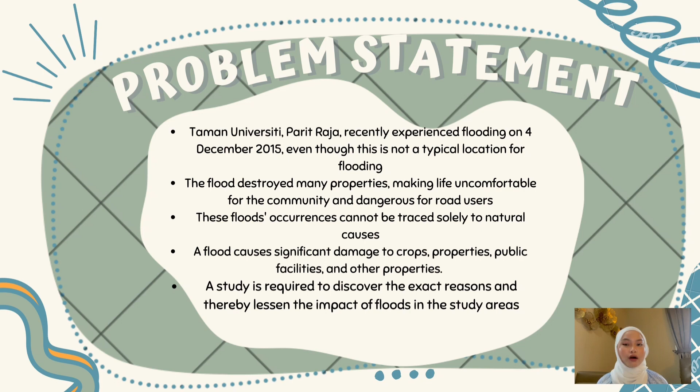There are a variety of factors that can cause floods. These flood occurrences cannot be traced solely to natural causes. As we all know, floods cause significant damage to crops, properties, public facilities, and other properties. Therefore, a study is required to discover the exact reason and thereby lessen the impact of floods in the study areas. Next, the chosen study area is at Taman Universiti Parit Raja.

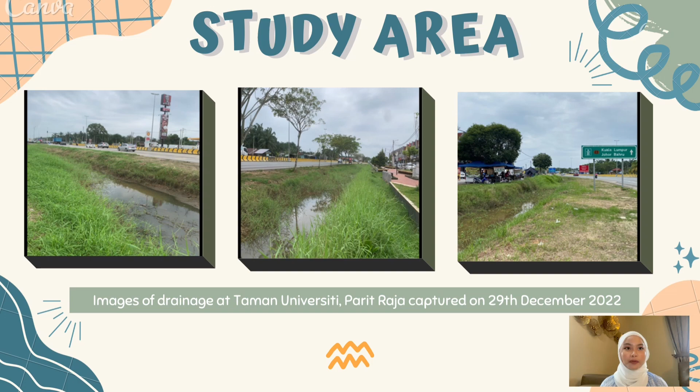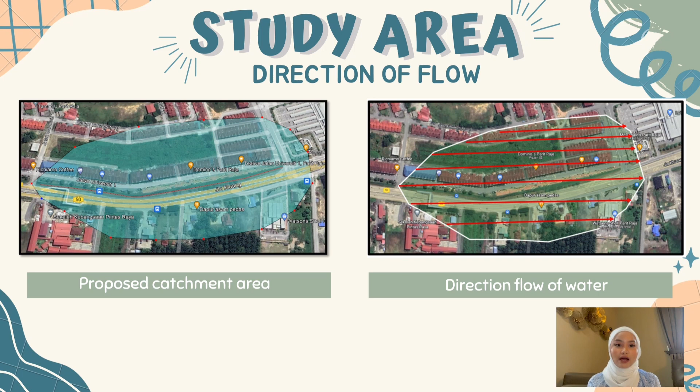The first figure shows the proposed catchment area for this case study at Taman Universiti Parit Raja. Meanwhile, the second figure illustrates the water flow direction inside the proposed catchment boundary. The anticipated direction of water flow in Google Earth Pro is governed by the terrain elevation. The current drainage is denoted by the white line, whereas the passage of water over land is denoted by the red arrow.

Based on observation in the study area, there are various reasons why this area is prone to flash floods. Heavy rainfall is the most significant factor that causes flooding. Besides, in this study, the issue that causes flash floods in the study area is the need to maintain the existing drainage system, because without maintenance, the drainage will get clogged with overgrown vegetation and trash. The weeds and overgrown grasses will clog the drainage and prevent the water from flowing smoothly.

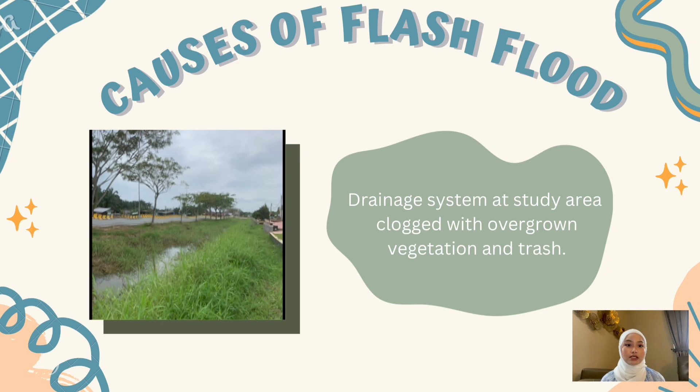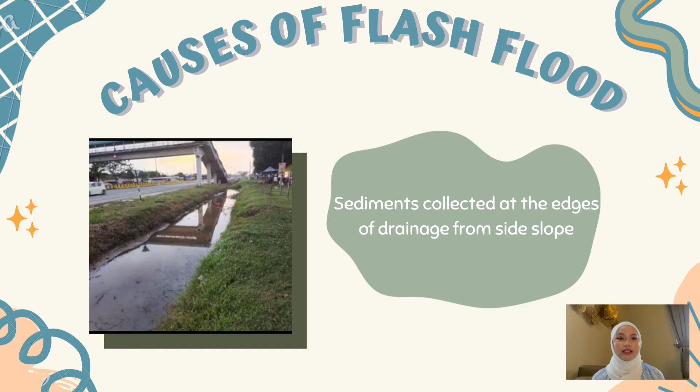Next, the formation of sediments at the drainage bottom is a second factor that can make the area susceptible to flash floods. From the observation at the study area, erosion from the existing drainage side slopes contributed to the formation of these sediments, which can increase the thickness of sediments at the drainage base. The figure shows sediments collected at the edges of drainage from side slope erosion. Therefore, this can cause the drainage depth to drop, which in turn causes the slope area to diminish.

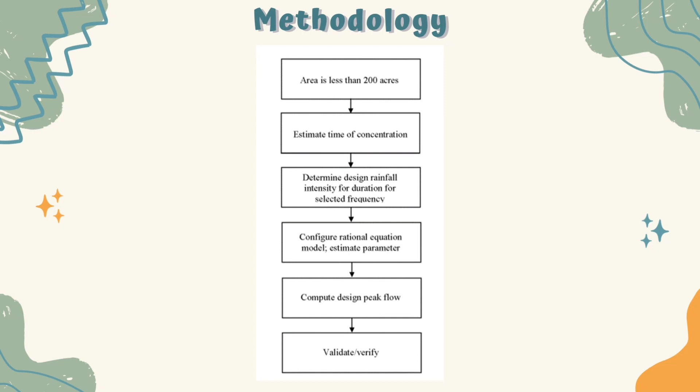Next, the design rainfall intensity needs to be determined for the duration and selected frequency. The intensity duration frequency, or IDF, curves will be used to determine peak discharge. In order to reduce the error, empirical equations can be employed to estimate the value of rainfall. Afterwards, the rational equation model will be configured. It estimates runoff from small drainage systems with a significant amount of impervious land. These steps will compute the peak flow of the design. Therefore, this study can design the stormwater system to prevent flash floods. That's all for the methodology.

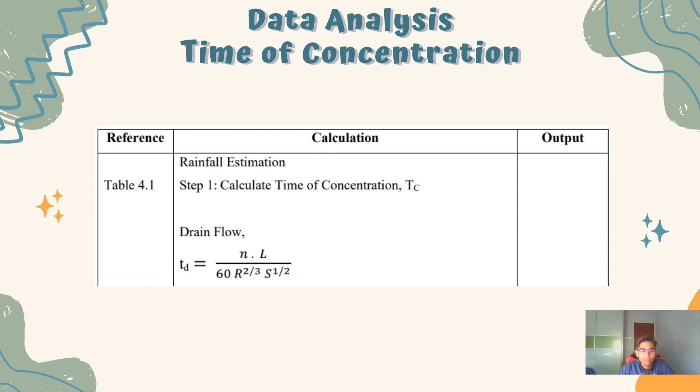DF210036. So I will continue to present about data analysis. First thing first, we need to calculate time of concentration using this formula. So we need to calculate area, wetted perimeter, hydraulic radius for our existing channel at Taman Universiti, Parit Raja. And we use Manning roughness n value of 0.050 because the channel has tall grass cover above 150 mm

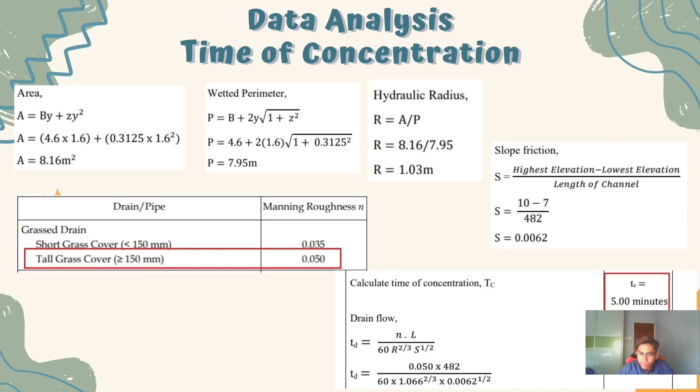at the existing channel. Then we need to calculate slope friction using this formula. After that, we need to input all the data into this formula and we get TC about 5 minutes or 0.0834 hours. After that, we need to calculate average rainfall intensity or ARI. First, we need to choose the station that is near to the existing channel at Taman Universiti.

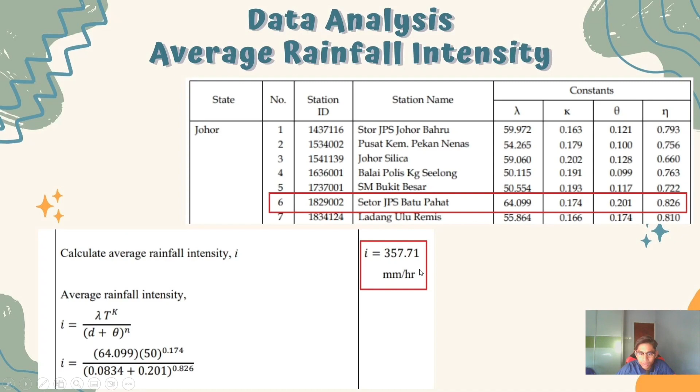So we choose Setor JPS Batu Pahat and we need to input all the constant values into this ARI formula to get average rainfall intensity, which is 357.71 mm per hour. Next, we need to calculate Q peak for our existing channel. For runoff coefficient C value, we choose land use commercial and business center because our existing channel is near to the business center at Taman Universiti. And for ARI, we choose above 10 years because we design for 50 years.

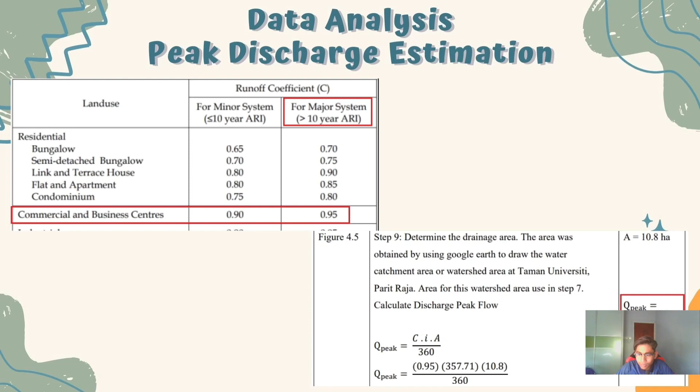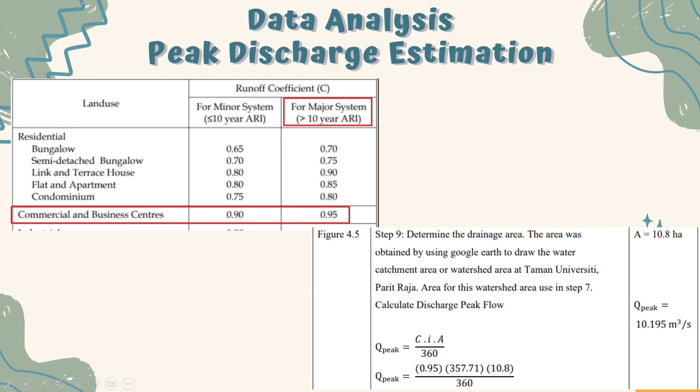For area, we obtain the area by using Google Earth to draw the water catchment area or watershed area at Taman Universiti. So our area is about 10.8 hectare. Then we input all the values into this formula to calculate Q peak for the existing channel. Lastly, we need to calculate discharge of the proposed design. Our proposed design is trapezoidal, same as the existing channel, but we just adjust the depth of the channel because the area at the side is narrow and not suitable to make a bigger channel.

So we use the Manning coefficient formula, and we need to calculate our proposed design area, wetted perimeter, and hydraulic radius. And then we input the values into this formula to get Q design for our proposed design. And for the final step, we need to compare the discharge between the proposed new design and the existing channel. Q design must be bigger than Q peak to avoid any flood at Taman Universiti.

It has been proven that excessive permissible development discharge is the major cause of flash flood at the roadside drain along Taman Universiti. As the dry weather flow combines with the discharge due to surface runoff, it will result in a higher value of discharge and cause flooding to happen. Next, it's due to irregular constriction of the earth drain flow channel.

The drainage channel is the conduit for water being carried by the earth drain. The channel can continually adjust its shape and path as the amount of water passing through the channel changes. The drainage flow velocity depends on the shape or cross-section of the channel, irregularities in the channel caused by resistant rock, and stream gradient. Next, the infiltration rate of the soil is one of the additional causes of flooding. From the studies, the area's soil type is silty clay.

It will result in a negative effect where, when rainwater flows through the impervious surface as surface runoff, it will cause an impact on the landscape through the development of watersheds. The occurrence of flood is easier because the infiltration rate is lower due to the thickness of the silty clay soil layer and subsurface layer. Despite the rainfall intensity or precipitation rate being low, the area will still be prone to flooding.

From the data analysis to propose the new design channel, the discharge value for this new design is determined after the discharge value of the previous channel, or discharge peak, is obtained from the previous calculation. The result for discharge peak from the calculation is 10.195 cubic meters per second. After calculating the discharge peak value, the discharge value for the new design is determined, which is 17.84 cubic meters per second. The discharge value for the new design is greater than the peak discharge from the previous channel.

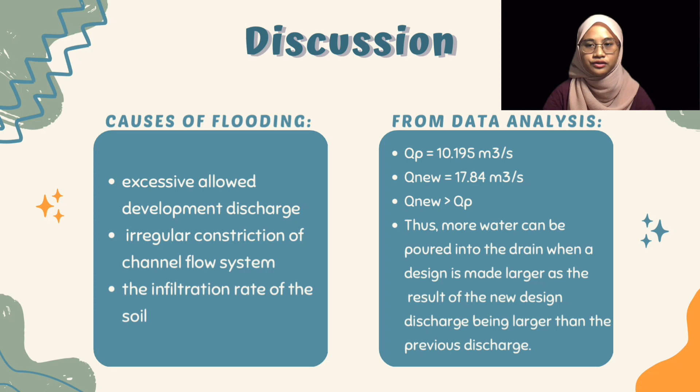As this new design exceeds the peak discharge value for the channel, which will be the limit to accommodate the water, it can control the amount of water that flows through the channel. As a result, the new design is still trapezoid in shape, but the channel section, height, top width and bottom width have been changed. Thus, more water can be carried by the drain when the design is made larger, as the new design discharge is larger than the previous discharge.

Next, the conclusion of our project. In order to prevent flooding at Taman Universiti, it's necessary to change the depth of the drainage because the surrounding area is too narrow to increase the width, as the place is located in a commercial area. By directing water away from the buildings and toward the surrounding area, this new design avoids water accumulation that could cause flooding. Water that has accumulated can muddy the soil, which can lead to soil erosion.

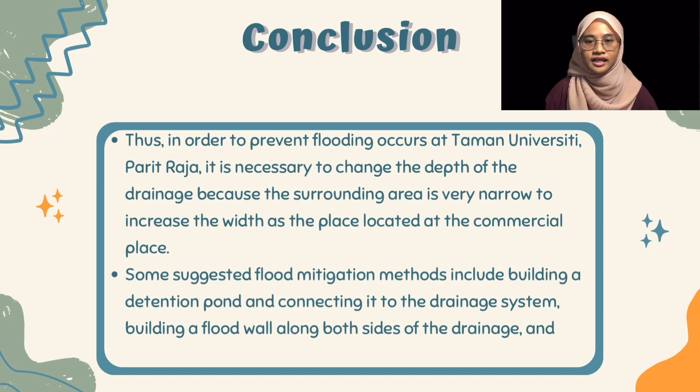The drainage system controls soil moisture, which prevents soil erosion. In addition, it can eliminate toxic or waste materials by flushing them down the new drainage channel with smoothly flowing water. Some suggested flood mitigation methods are building a detention pond and connecting it to the drainage system, building a flood wall along both sides of the drainage, and performing proper channelization and dredging work. That's all. Thank you.